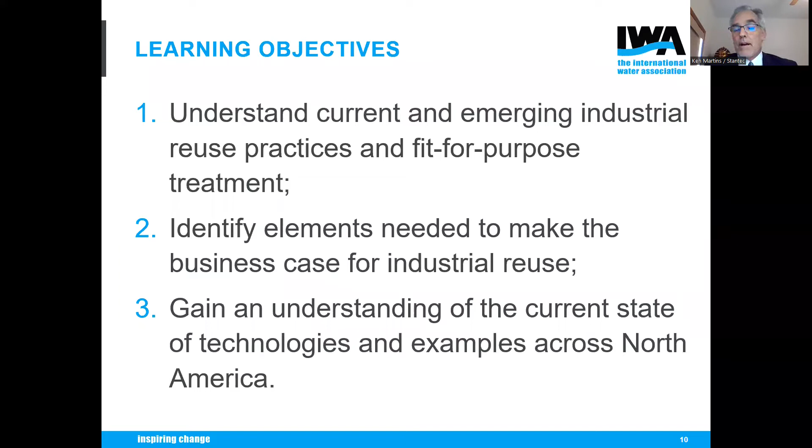We have three learning objectives: first, understand current and emerging industrial reuse practices and fit-for-purpose treatment, and identify elements needed to make the business case for industrial water reuse—I think Kyle's presentation will be very poignant there. Third, gain an understanding of the current state of technologies and examples across North America, though all of these can apply worldwide.

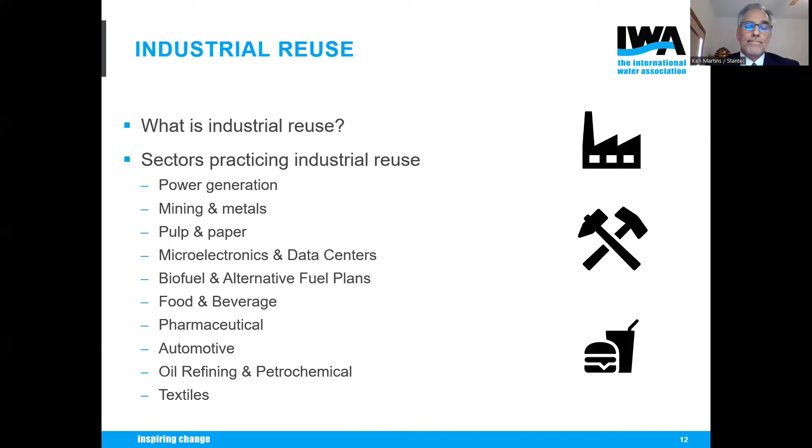Next slide. So let me introduce Patrick. Patrick has over 25 years of focusing on and understanding the challenges of the market and customer and bringing innovative solutions with tangible values to meet their needs. He has a broad range of municipal and industrial water experience, including municipal wastewater, potable water treatment, food and beverage, mining, power, and pulp and paper. During his time in the water industry, he's held various leadership roles at NALCO, GE Water, Evoqua Technology, and in his current role as commercial excellence leader at DuPont Water Solutions. So a very broad base. I welcome Patrick.

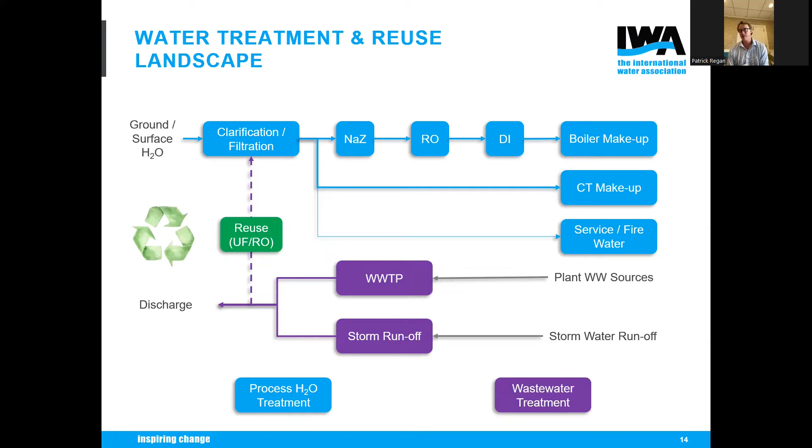I'll pause on that, we'll get back to a bit more, and just push to the next slide - I'll start talking about the fun stuff, the actual example. Next slide, please.

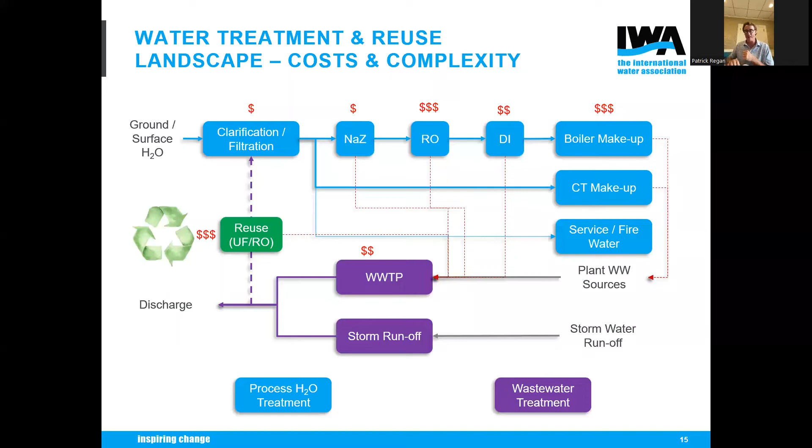So again, typical refinery, and just with respect to the relationship we have with a customer, I'm going to be a little high level on some of these, but certainly welcome any questions, and I'll do my best during our Q&A or even in a follow-up to provide some additional insight where I can, let's say, stay on the up and up.

Typical refinery, where the refinery, depending on the complexity, depending on what type of crude slate they're operating on, is going to use a different volume of water. I'd say they're typically going to use anywhere from 0.3 to 1.3 barrels of water for every barrel of crude refined. Anyone who's spent enough time in a refinery can appreciate how that can range, and potentially go outside of those spec limits. But ultimately, the water quality requirements can vary from one refinery to the next.

One could argue that no refinery is made like another, but fundamentally the use of the water is ultimately treating to the need. I'll zero in on the use of water for boiler, or ultimately for cooling tower makeup. And as we're treating to the need for boiler water, and really I'll frame it as cooling tower water, it's all about how much we can optimize our cycles of concentration within that cooling tower, specifically an evaporative cooling tower.

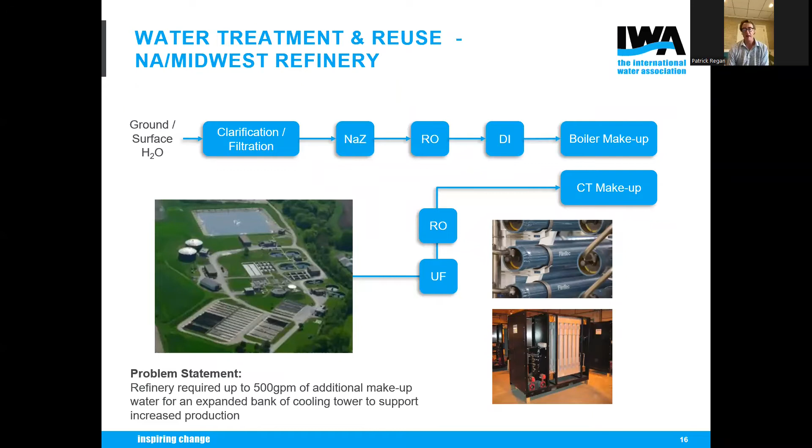So if I can go into some detail on the next slide, there's two components. And it wasn't clear—next slide. Thanks.

Thinking about it from a planning standpoint, any of us who have looked at or contemplated a water reuse project, we want to look at availability. We want to look at the seasonal demand, even seasonality of the supply we may potentially tap into, as well as the quality and even the physical characteristics of that supply. But ultimately, it taps into the overall complexity of the refinery.

So really, as the team approached this project, we looked at the logistics of the quality and quantity of the water we would get from the neighbor, the municipal wastewater treatment plant, and just even getting into how much it's going to cost us to pump it from here to there. What kind of piping do we need to lay? What kind of infrastructure do we need to put in place? Does it need to go over a road, under a road? How do we maneuver that? These are all things we had to take into consideration.

But really, it came down to the return on investment, and ultimately, it came down to whether this setup meets our future demands for this phase and the likelihood of future phases down the road, future expansions for this refinery—which fortunately, the answer was yes.

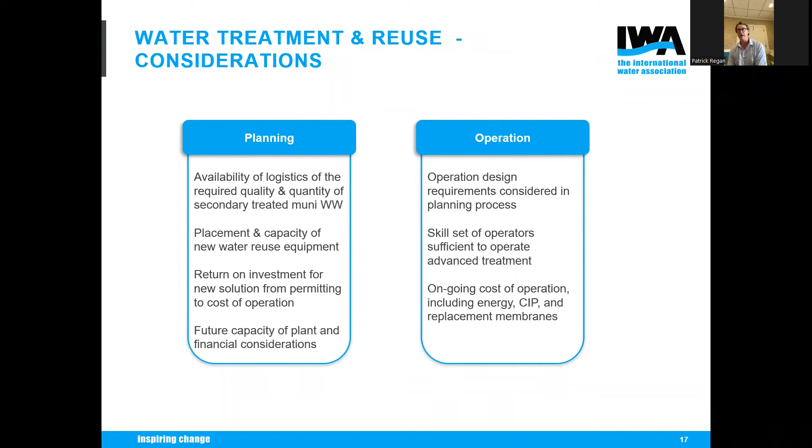So again, if we look at the treating to the need in this case, we're going to take the wastewater from the neighbor, treat it, and use that for makeup water. So think about it in terms of treating to the need—we're looking at a UFRO operation. So if you can move to the next slide. And I think as we look at that, there's a complexity that comes along with that.

Operators who haven't operated a UF system, or an RO system before, it's not just a simple change. There's some real sophistication that goes along with that, one that I think most operators are very capable of.

But in the end, what we did is we designed a UF system that had a tight footprint using a PVDF membrane that was small in footprint, pressurized UF modules, but ultimately would take that permeate and remove the suspended solids to bring those down to less than 0.05 parts per million. From there, set the stage for the RO to do its job, to take some pretty brackish water and bring that down to a TDS of less than 100. Ultimately, the design there was to set us up to optimize the cycles of concentration within the cooling tower.

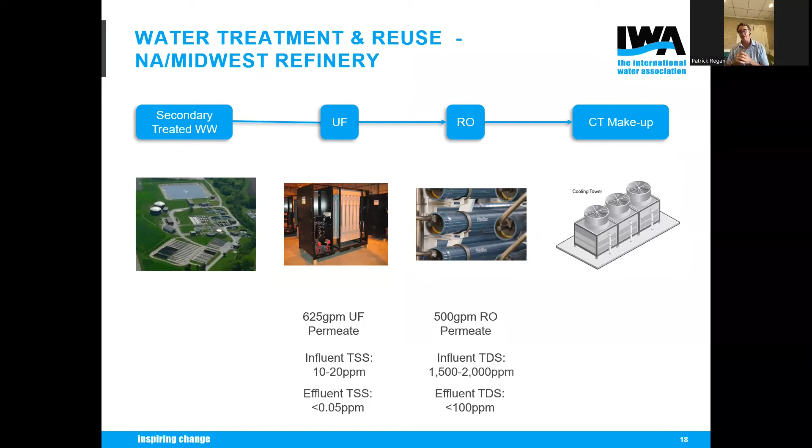So on the next slide, what you'll see are some details in terms of the specs, a design basis and summary that we use to figure out what flux rates we could operate at, how hard we can drive the RO system, et cetera. I think these are fairly typical parameters that many of you have seen coming from the unconventional source water of municipally treated wastewater, secondary treated wastewater at that.

But what we looked at was ultimately a UF system that gave us 90% recovery, fairly healthy, right? We don't want to recycle water only to give it up in the process. But as we move forward to the RO system, we used a conventional RO approach in this case, which gave us a design recovery of about 80% using a 16-8-4 element configuration in the RO design.

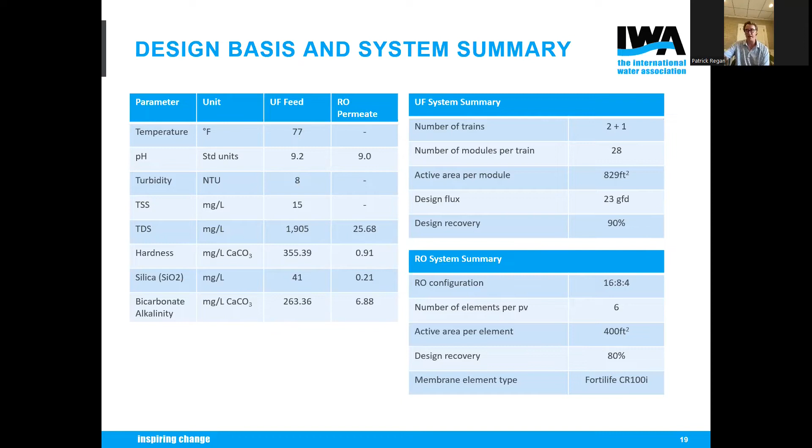I'll just speed up here a little bit for the sake of time. If I can go to the next slide, some considerations, and I'll really focus on the first bullet here, which is biological.

The key thing to think about, first off, is the pillars of a good water treatment program for a cooling tower. There's three legs to the stool: biological control, scale control, and corrosion control. Biological, that leg of the stool, when you're talking about recycling municipal wastewater, is very important. And it was very much important with this customer.

So it was key that we were diligent and put control mechanisms in place, ORP monitoring in place to maintain a free chlorine residual in that makeup water of 0.5 to 1 ppm, not only in the makeup water, but also in the recycling water, and ultimately measured in the blowdown water for the cooling tower.

Now, as I alluded to before, the LSI, the Langelier Saturation Index, is kind of the gospel of where we need to orient in terms of the performance of the program. Especially when we consider the use of RO treated water, we want to be careful about how much we're removing. So what we ultimately ended up doing is blending that makeup water to a point where we could get full advantage of the RO water and the supply that came with that, but we could still keep that LSI index oriented in a nice balanced sense. We even erred on the side of corrosion to some degree, with a pH target of about 7.8, just to keep us clean.

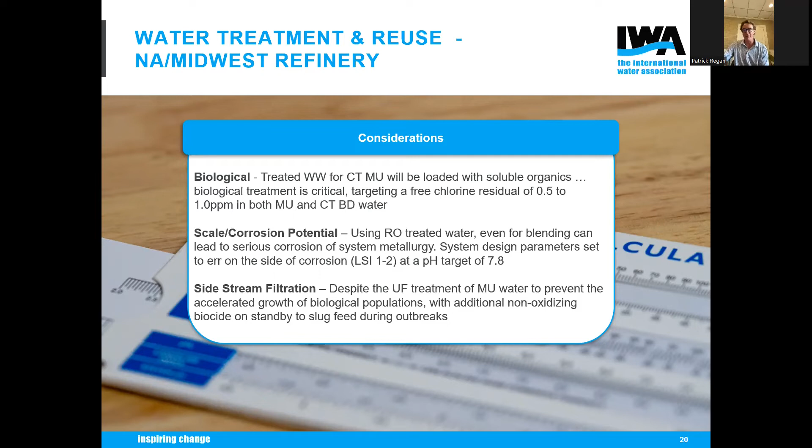So in the spirit of Ken's well-placed introduction, if we go to the next slide, most of us will get these slides as a follow-up. This is a quick example where we looked at another application for a different refinery in the Midwest, an Ohio refinery, that was challenged with variability in the water, and how they could use an RO system to recycle that water in the face of big swings in both chemistry and volume.

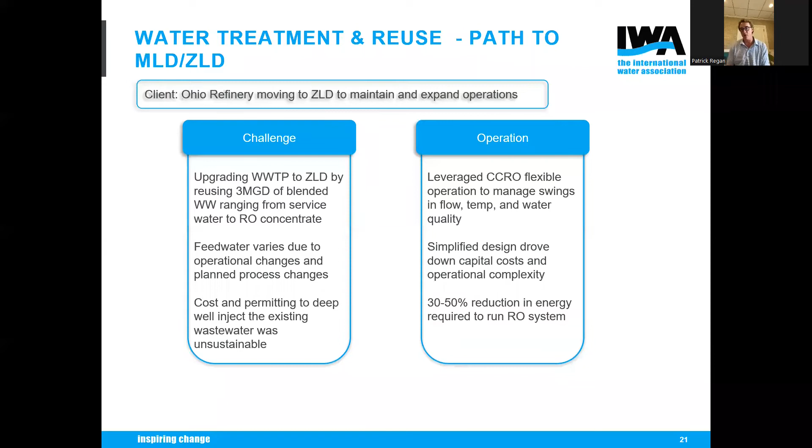Let's punt forward to my last slide, the graphic showing the spectrum of particle sizes and where different technologies play. If there's any shameless commercial, this is it. Given where we are recycling water, what are we trying to remove, what are we trying to achieve, what goal are we trying to accomplish? Typically, as in my example, we see UF and RO as go-tos, but certainly there's NF, ion exchange, etc. The DuPont organization focuses on what's shown in orange, and that's not all of it, but I think most of the opportunity we see within industrial water reuse, or really recycle as I've defined it, lies within those orange buckets.

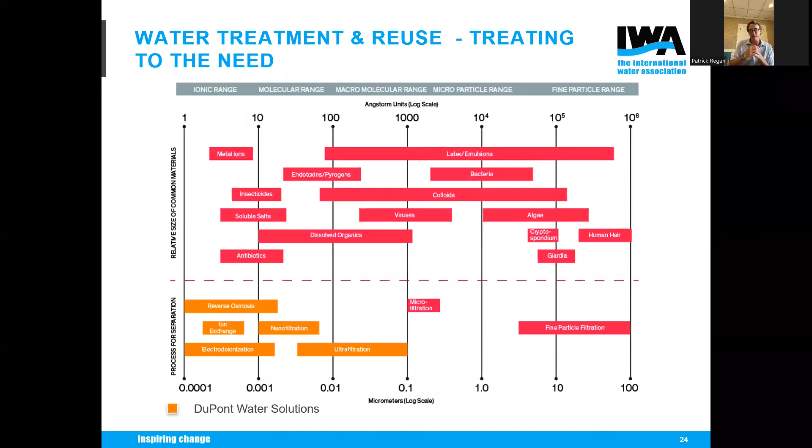I'll pause there, as I expected and went over, but hopefully not too bad, Ken, to throw us off from our agenda. All right, thank you Patrick, that's a good meaty presentation, a lot of content.

Thank you. I'd like to next introduce Laurent Herbiet. He's with Sistemas Pluviales, an architect and sustainable designer, and he'll describe how industrial rainwater harvesting and municipal water wetlands are adding resilience to Mexico's largest city, Mexico City. He'll talk about rainwater collection and treatment designs scaled for large commercial and industrial applications, potentially in some cases cutting use by as much as two-thirds, a terrific number. Also, while water utilities discharged into natural water treatment systems can produce recycled water for potable reuse, mitigating water shortages in Mexico City's historic wetlands district. Based on Mexico City receiving roughly 30 inches of rain a year, a 55,000 square foot roof of a manufacturing facility would save as much as 1 million gallons a year. The numbers add up pretty quick, don't they? All right, with that, Laurent, you're off.

Thank you, good morning everyone, good afternoon for our European friends. Can we go to the next slide please?

As an introduction, Mexico City is an endorheic basin, so all the water collected within the basin used to form a series of 5 lakes. Over the last 500 years, we lost 99% of the surface of the lakes, and most of the flatlands became urbanized. So rainwater and wastewater have no place to be stored, regulated, or managed within the city. It's very hard, so most of the infrastructure was designed to evacuate water as fast as possible, speaking of rainwater and stormwater.

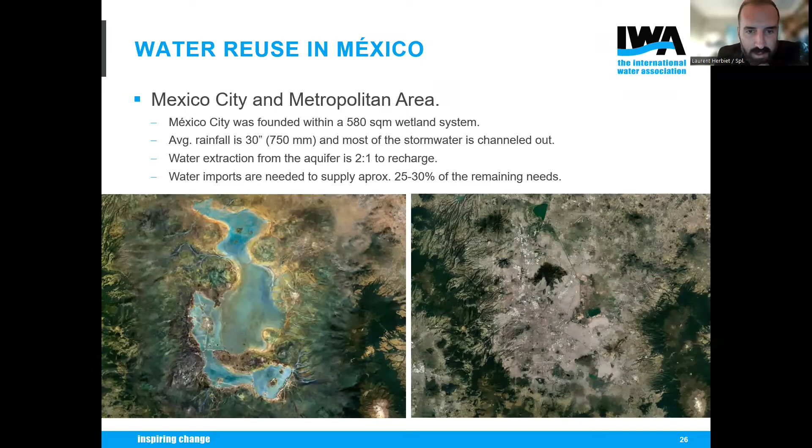If we can go to the next slide please. The city has been working on sustainable solutions for over 18 years. We had one of the first rainwater strategies for all construction except single housing. Every commercial, industrial, and heavy residential building like multifamily housing was required to do rainwater harvesting and reuse for non-potable uses, but it was not extremely well designed because it was one of the first.

So we've been working with the city over the last 5 years to expand and adjust this requirement, which is called Sistema Alternativo, translating to alternative system. Now it's being implemented heavily throughout the city because we have the experience and the technology to do this. Next slide please.

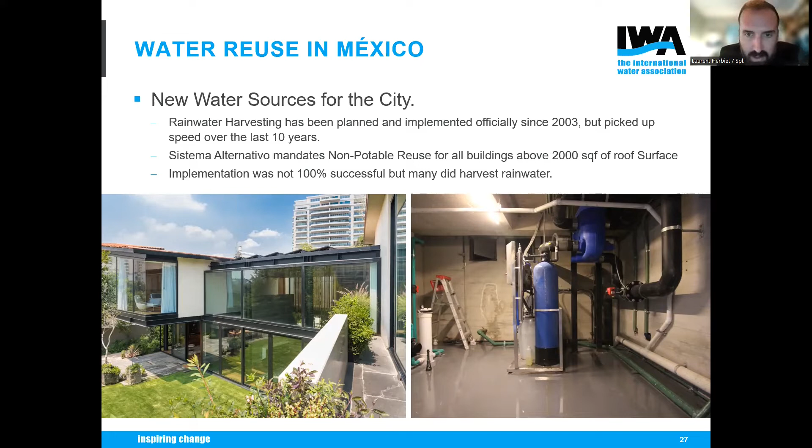We based our systems on a combination of different theories. The first was the German standard, using very simple rainwater filters, calm inlets within the stormwater tank, overflow siphons, and floating suctions to get rid of most of the problems with TSS and pollutants in the water.

But we incorporated specific and very efficient rainwater siphonic systems. You'll see in a bit why we use this.

And we implemented an automatic first flush system, which we choose as a standard to remove 1/8 of an inch through most rain events, which we use as automatic cleaning of most pollutants on the roof. You can turn this off during the peak rain season when you don't need any first flush, and you can bypass it during the dry season.

We have almost 6 months in which we could not get good rainwater quality if we wanted, and we try to bypass this to any SUDS or rain gardens or stormwater destinations, so we don't pollute our rainwater tanks.

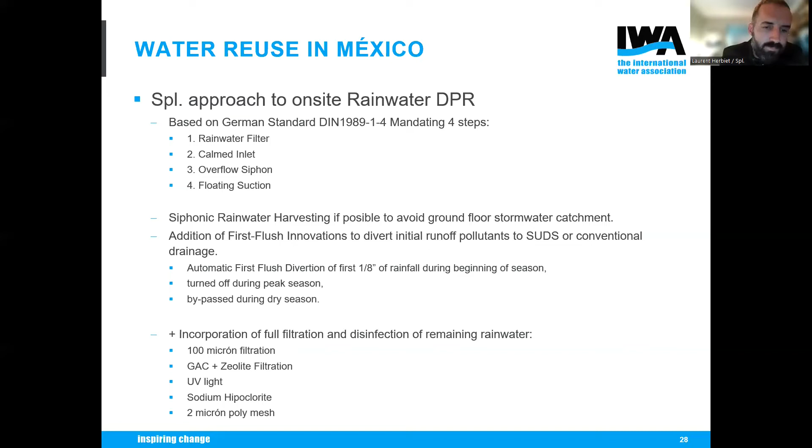Next slide, please. Very quickly, for those of you who don't use siphonic systems, I recommend it very much. These can help reduce the number of downpipes by a factor of 10. We can get the water to one point of the building where we want to have our stormwater or rainwater tank, and we reduce all the other pipes. We can have a very long run with no slant or grade in our pipes, very small diameter pipes, and the water we harvest is the best water we can have.

We choose to harvest it in one point. Why do we have very small diameters? Because this is just the water that's been channeled through the pipe. The siphon allows us to not need air or a gradient to move the water. We just need the suction of the downpipe. This is very, very efficient for rainwater harvesting, and for architectural and design purposes it's the best thing you can do.

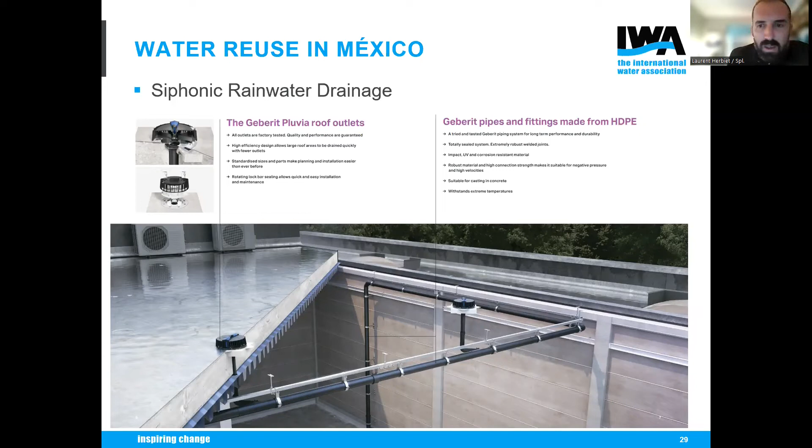Next slide, please. Here you can see how we have no loss of height during the conduction of this water, the small diameter, and the reduction of downpipes. This is very fast to install, very cheap to install. And if we put a stormwater or first flush diversion system in one point, it's very easy to control whether we want to harvest or not.

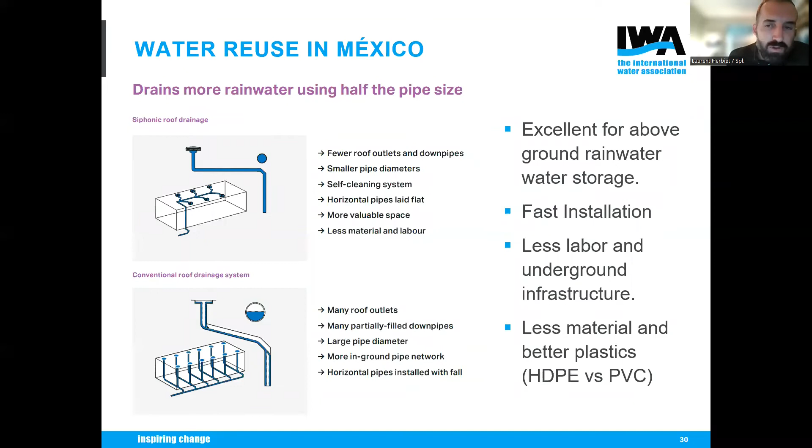Next slide, please. You can see here one of the case studies. This is a pharmaceutical packaging and manufacturing facility in Toluca. All the water is channeled to one point. In this case, we have conduction above ground due to structural constraints in the small plot, but we have one point where we choose to harvest and send to our rainwater tank, or send the rest to the stormwater system. So it's very, very user-friendly.

Just one button can decide if we want to harvest or not. In this case, all the rainwater from this 70,000 square foot facility was cleaned and used for potable uses like hand basins and further treatment in the process, or also fire protection. And we reused the wastewater for toilets and irrigation, so we were 100% sustainable. For a couple of years they ramped up a little more of the water use, but the combination between potable reuse of rainwater plus reuse of non-potable wastewater meant we managed to be 100% independent for a couple of years. Then we were between 90 and 95%.

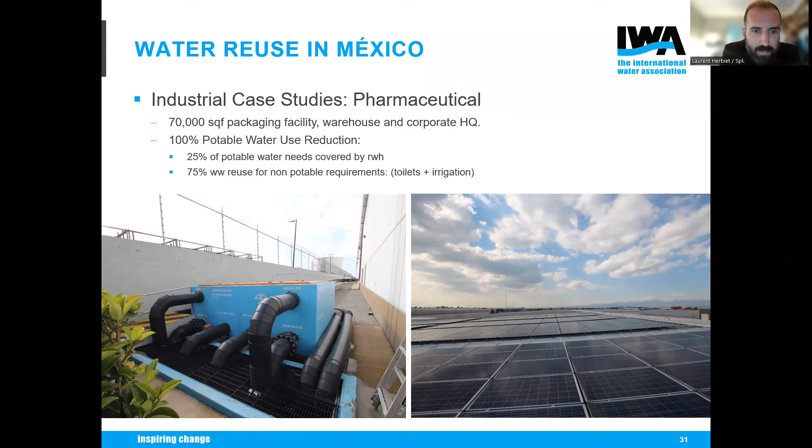Next slide, please. This next project is in Yucatan. The Yucatan Peninsula has very hard water, so you need a lot of softening in the water. When we harvest rainwater in this automotive parts manufacturing facility, they use a lot less of their softening equipment. Most of these facilities already have some kind of treatment in their pipeline, so we just add to their original source water. In the Yucatan Peninsula it's great to harvest rainwater because it rains a lot, and the water we get is much better than the source water from the wells or from the municipal supply. So it's very convenient and very cheap to use rainwater.

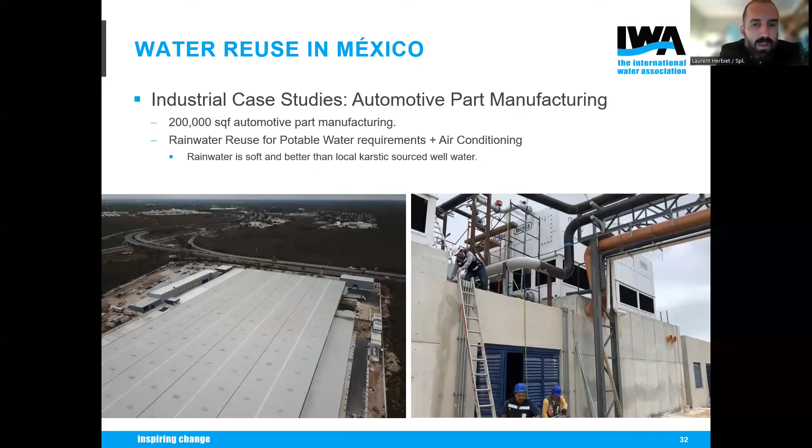Next, please. This is the way we use siphonic systems.

We can have huge harvesting surfaces with a very efficient one-point delivery system.

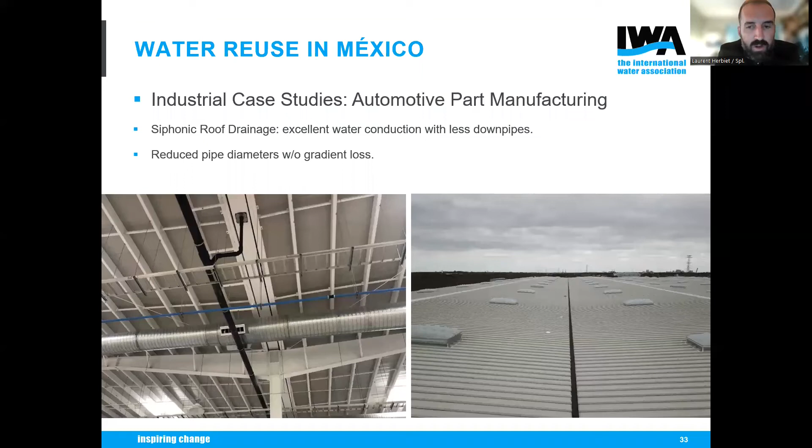This is another industrial case study: a beverage facility where we harvest 40,000 square feet per warehouse, with a total forecast of 300,000 square feet in the next couple of years depending on warehouse sizes. We can harvest 18,000 cubic meters of potable water, used also for manufacturing and product production, because we get much better water quality from rainwater than from the wells, which are being depleted in the area.

We will also have wastewater reuse for irrigation and toilets with a treatment wetland in the future.

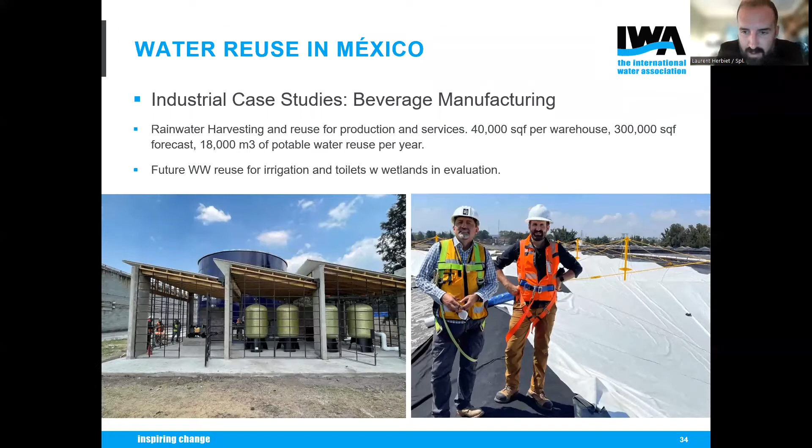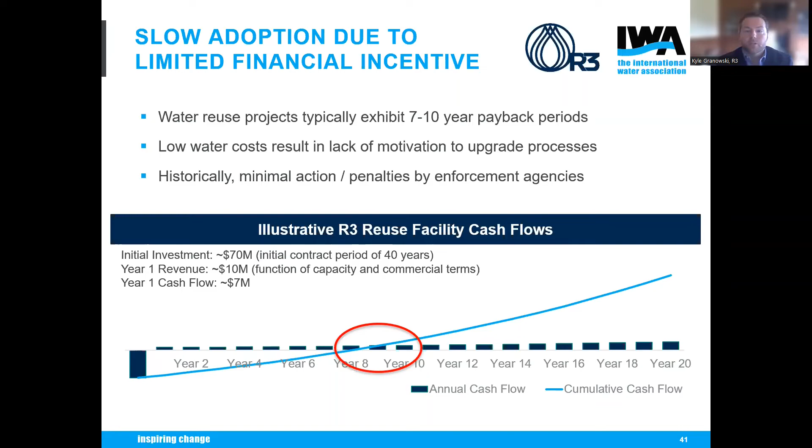I wanted to go through some case studies at a higher level versus what you just recently heard about in terms of a couple of projects. Where we think industrial water reuse can really see more adoption is by implementing it in a way that helps solve other business challenges as well.

R3 is working with a chemical manufacturer where we found that water reuse is a strategy they want to implement, both from an ESG perspective and a resiliency perspective, based on local municipal treatment facility challenges. But the reuse facility could also solve other business problems related to stormwater drainage issues and river intake issues. So we're really trying to look at water reuse as a way to solve multiple business challenges, while driving what we're all after here—reduction and reuse of water.

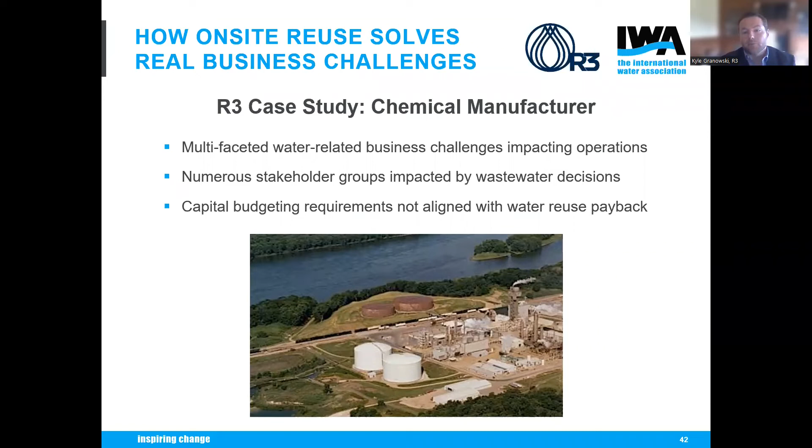In this particular project as well, capital budgeting requirements are completely out of alignment with where management sees the need for project paybacks, and that's where a group like R3 can help come in with financing for the project. Could you go to the next slide, please?

Similarly to the chemical manufacturer, we're working with a poultry processor, where the requirements to truck away sludge to land applications or to landfills is becoming increasingly difficult. There have been several cases where landfills have collapsed, and part of the view is that it's due to heavy sludge from food process waste and so on.

In this instance, R3 is developing the solution with the client to not only reduce that land application by about 60% in terms of the number of truckloads required, but also to reuse some of the processed water downstream in the facility to reduce some of that initial water overhead, and again to do what we're all looking to do here—reduce overall water consumption. On this one, capital budgeting was another major consideration, something I think we'll probably have discussions around in Q&A.

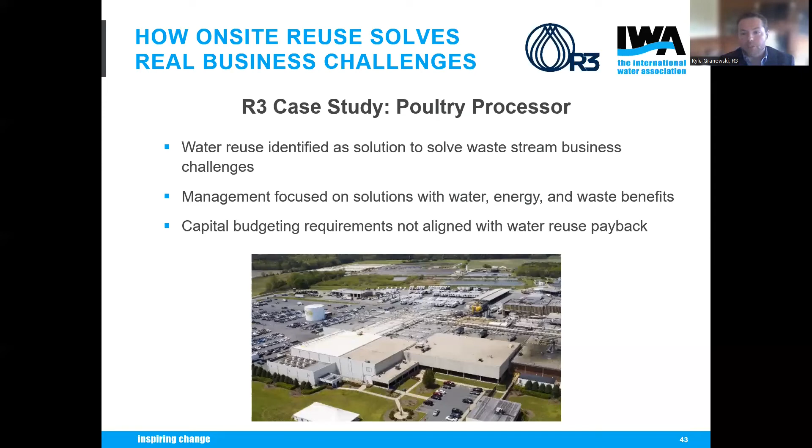What the R3 model helps to do—and others out there as well—is really reduce that initial upfront requirement when it comes to trying to figure out if reuse projects are even feasible, if they make sense for your facility, and so on. A lot of groups can try to go down this path, and what we see is they ultimately stop because there are pretty heavy checks at the front end to see if you even have a feasible opportunity. Timelines also become difficult when, if you're starting from scratch, you can be looking at a multi-year feasibility study to understand if reuse makes sense.

A lot of times those types of projects are tough to continue to push forward on, frankly. The CapEx requirement is probably one of the most major considerations, based on the fact we just came out of COVID and so on. Companies are looking at capital projects differently.

They're looking at cash and operations differently, and that's where R3 is hoping to help—we can provide that CapEx and eliminate that capital budgeting requirement. One aspect that seemingly gets overlooked in a lot of water projects is working with stakeholders. Patrick mentioned it well—partnering with nearby facilities, but there are also stakeholder groups related to the treatment system, making sure we're not causing special groups to get really high rate hikes because we take a substantial effluent stream offline. Doing that more fulsome approach is a way to ultimately get projects across the finish line.